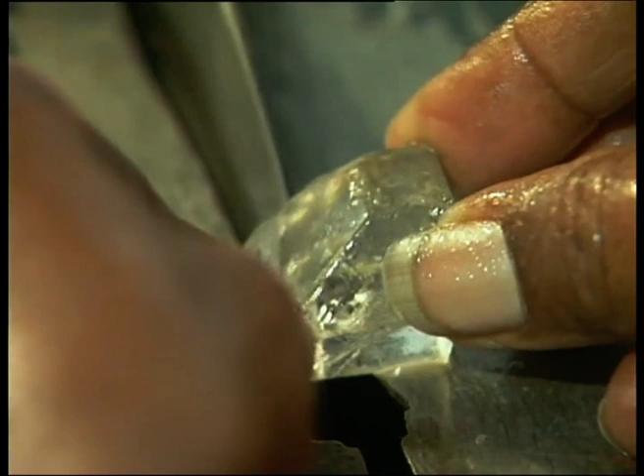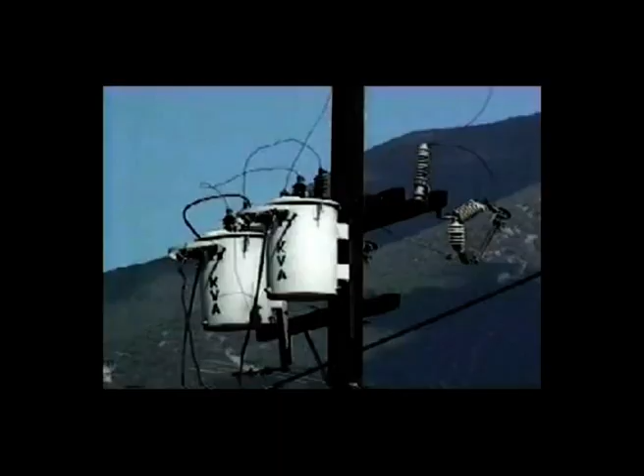The total quantity of usable energy available to people is called energy supply. Energy is of many kinds: electrical energy, kinetic energy, mechanical energy, and chemical energy. Electrical energy operates several appliances like pump sets, fans, grinders, vacuum cleaners, washing machines, and other industrial equipments.

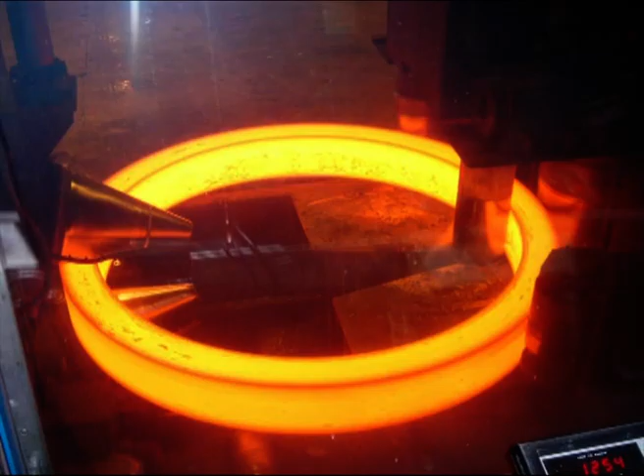Heat energy is used to cook food on stoves, shape metals, make bricks, and for several industrial processes requiring heat as a major or catalytic factor. Similarly, mechanical energy is used for many activities like moving vehicles, lifting and breaking materials, handling and aligning objects.

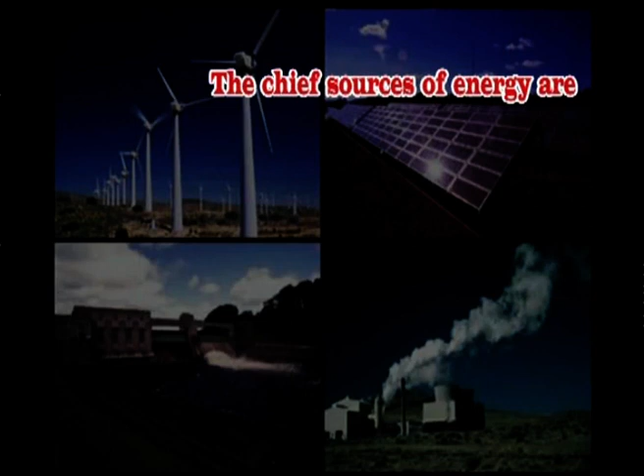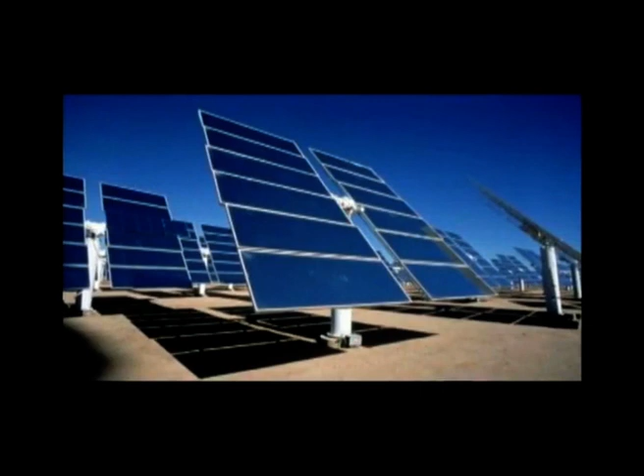Energy may be obtained directly from an energy source or indirectly. Energy is derived from one or more than one source. The chief sources of energy are fossil fuels, flowing water, biomass, and atomic minerals. In addition, solar energy, wind power, tidal energy, chemical and geothermal power also provide some amounts of energy. Not all continents have all the needed energy resources.

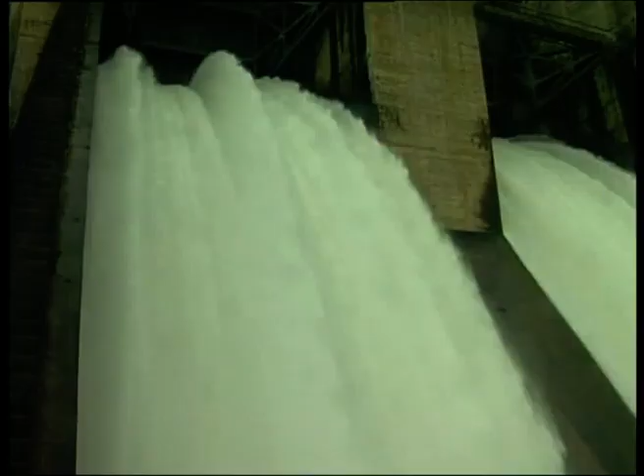These sources are classified into two major groups: renewable and non-renewable energy sources. First, renewable sources are those which will be available for human consumption again and again. The energy derived from water as hydroelectric power, sun as solar energy, and wind energy are renewable energy resources. Second, non-renewable energy resources are those which are permanently consumed for generating the energy and need further supply.

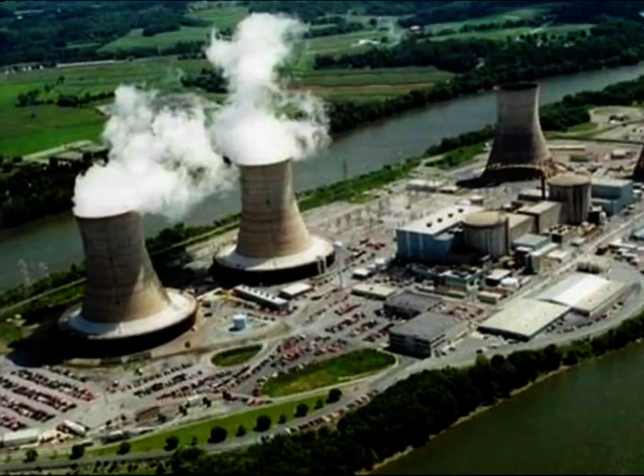Fossil fuels like coal, oil and gas, fissionable materials for nuclear power generation, and geothermal sources come under this category.

In this episode, the energy resources are discussed under the following modules: first, energy from fossil fuels; energy from sun and wind; third, energy from water; fourth, energy from biomass; fifth, energy from nuclear and other sources.

About 85% of the world's commercial energy comes from coal, oil and natural gas. These are called fossil fuels since they have been developed from the fossilized remains of prehistoric plants and animals. The use of these sources depends on their availability in the country.

Coal is made up of organic material which has escaped from oxidation in the carbon cycle. It is an altered residue of plants and trees of older forests which have been buried under sediments, and they were subjected to a set of geological processes and transformations.

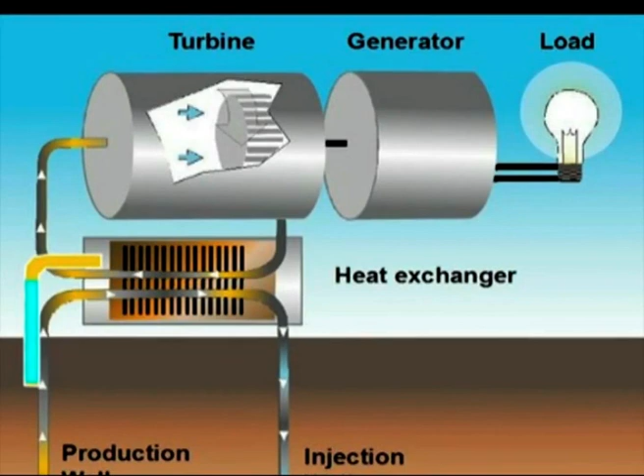Coal is burned to create heat to turn water into steam. The steam is then used to rotate turbines which will rotate the dynamos to generate electricity. It is also converted into another usable form called coke.

It is a charcoal-like solid which is an essential raw material used in the production of iron and steel.

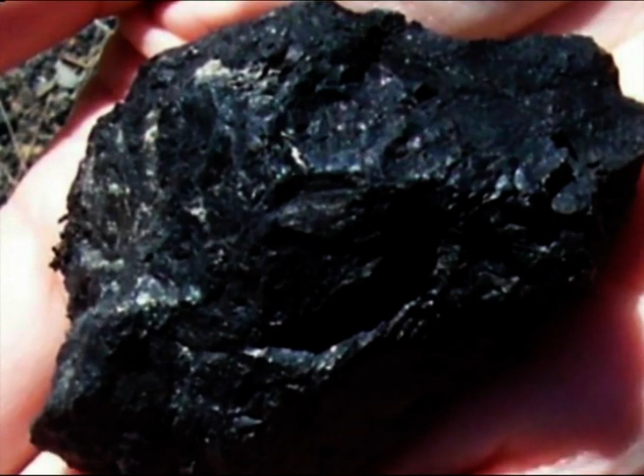Coal occurs in sedimentary basins as coal seams or layers. There are 4 types of coal occurring in the order of decreasing carbon content, volatile matter and moisture: anthracite, bituminous coal, subbituminous coal and lignite.

Peat is partially decayed plant matter found in recent swamp deposits. Peat and wood are the basic materials before the formation of lignite.

Anthracite is a rare form but the hardest variety of coal. It also contains more carbon and produces more heat than the other varieties.

Bituminous coal is the most commonly used coal by industries. It contains more carbon and produces more heat than either lignite or subbituminous coal. It is also suitable for making coke.

Coal contains some sulfur compounds. The sulfur content may be very low, that is less than 1%, or medium, that is 1 to 3%, or high, that is more than 3%.

Coal is mainly used in thermal power plants. While using it, the one having low sulfur will cause less air pollution.

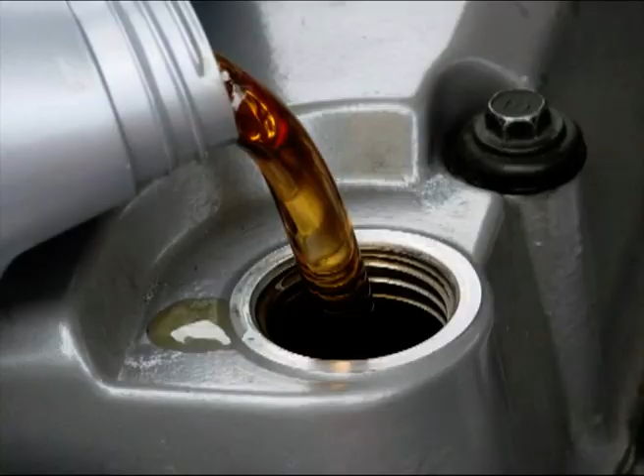The next major source of energy comes from oil. The oil that is derived from rocks is called petroleum. That is, petro means rock, oleum means oil.

Petroleum furnishes about 40% of the commercial energy used in the world. It provides most of the energy used for transportation and other activities of the population. In general, petroleum and natural gas, that is methane, are hydrocarbons. They are fossil fuels formed from organic material that escaped complete decomposition after burial. Petroleum is a complex mixture of hydrocarbons containing nitrogen, sulfur and oxygen.

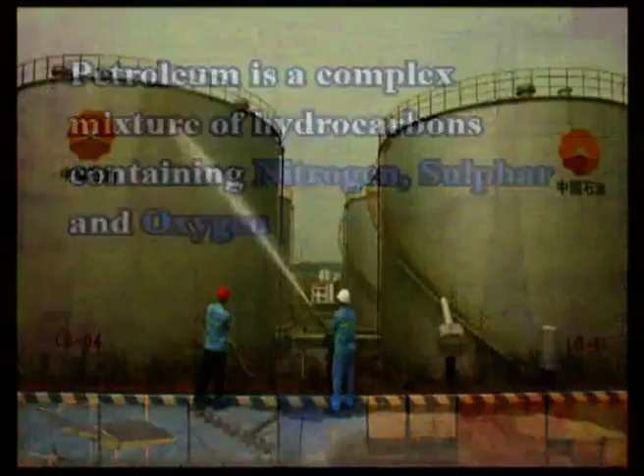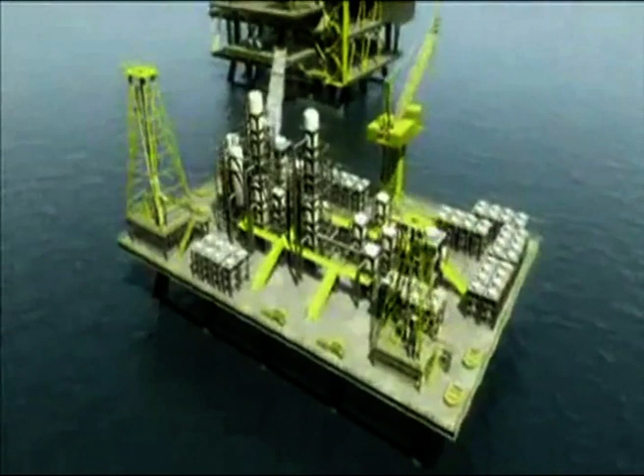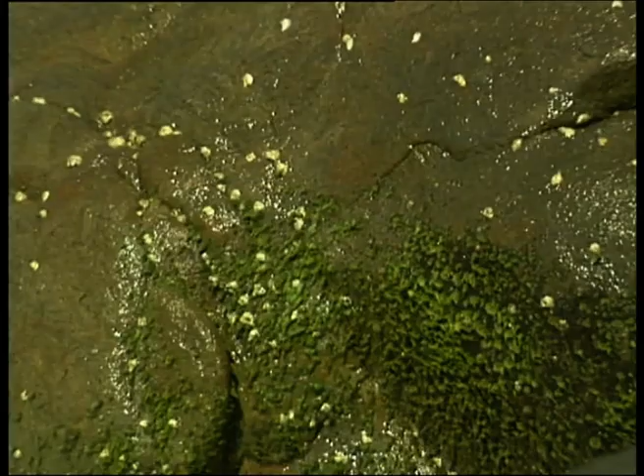The major source for oil and gas is fine-grained, organic-rich sediments buried to a depth of 500 meters or below stagnant oceanic waters. These might have experienced a thrust due to an increase in pressure and heat. The water is deficient in oxygen. Various geological and biological processes, involving bacteria, have promoted the chemical transformation of this organic material into hydrocarbons.

They tend to migrate through porous sediments called reservoir rocks. Like coal, oil also contains some impurities that can cause air pollution, but refineries can remove many of these pollutants when they process the petroleum.

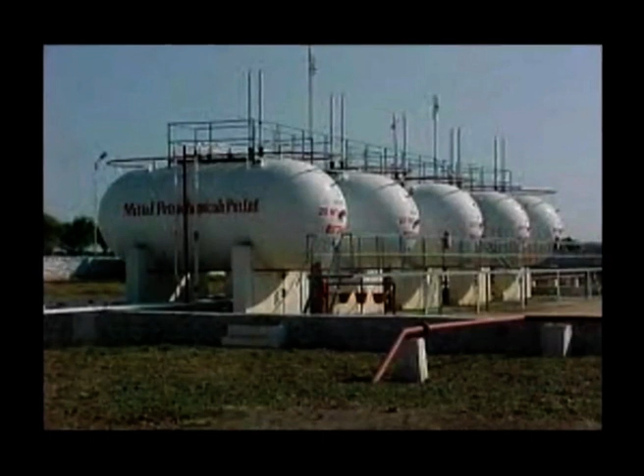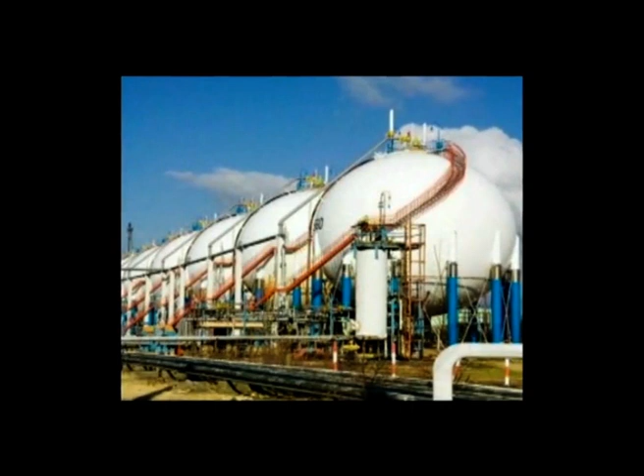Natural gas is the most convenient fossil fuel. It causes little to no air pollution. Natural gas is a clean source of energy because it is refined naturally during its formation within the earth and does not require further refining. In addition, it can be compressed into a liquid and transported long distances through pipelines.

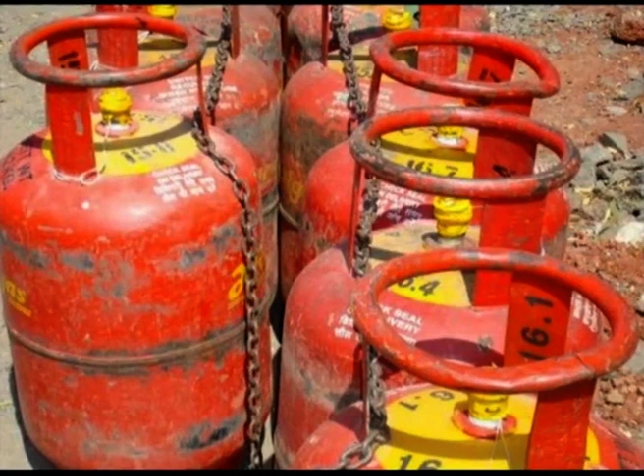Natural gas accounts for about 21% of commercial energy used in the world. Millions of people use natural gas to heat their homes, cook their meals, and dry their laundry. Typical gas consists of hydrocarbons having a very low boiling point. Methane, the first member of the paraffin series, makes up 85% of typical gas.

The following types of gas have been recognized based on their composition. First, dry or lean gas, comprising mostly methane. Second, wet gas, containing higher hydrocarbons. Third, sour gas, when containing more hydrogen sulfide. Fourth, sweet gas, containing little H2S. Fifth, residue gas, containing higher paraffins for extraction. Sixth, casing head gas, derived from oil wells by extraction at the surface.

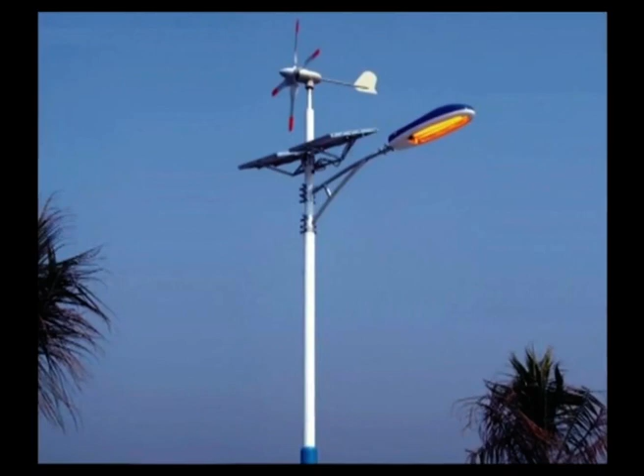The energy received from the sun's electromagnetic radiation is called solar energy. It is also used to produce electric power. This is a non-conventional and renewable energy source. There are two methods through which sunlight can be converted into electric power: first, photovoltaic conversion, and second, solar thermal conversion.

It is reported that solar energy falling on the earth every 29 seconds is equivalent to the human energy requirement of a day. It comes from the sun and is plentiful, but its distribution is sparse. It must be collected and concentrated to produce usable power, which requires some special devices. Hence, harnessing solar energy is an expensive affair.

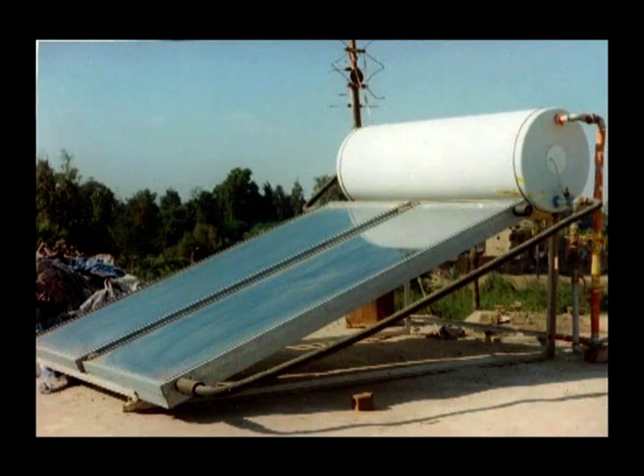A typical solar water heater consists of a coil of copper pipe brazed to a blackened metal base. This assembly is covered by a transparent glass plate or a plastic sheet. The water passed through the coil gets heated by the radiation. A very high amount of heat is trapped through this process during summer months.

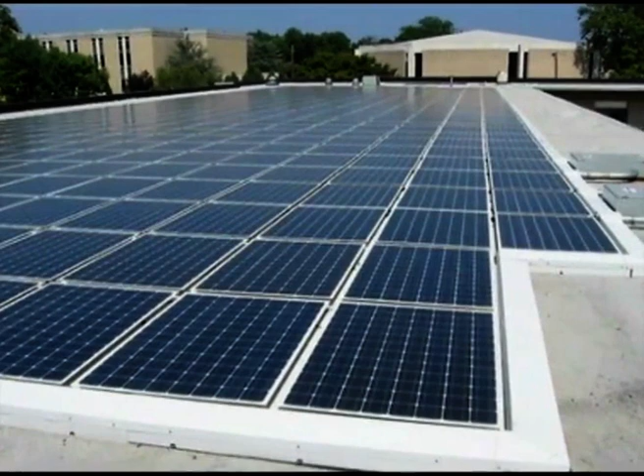Solar energy is also caught to provide power using solar cells. Solar cells are devices made from crystals of silicon to produce electricity from sunlight. They are the photovoltaic cells. Research continues on the applications of solar energy for pumping up water, refrigeration, solar ponds, and temperature control in buildings.

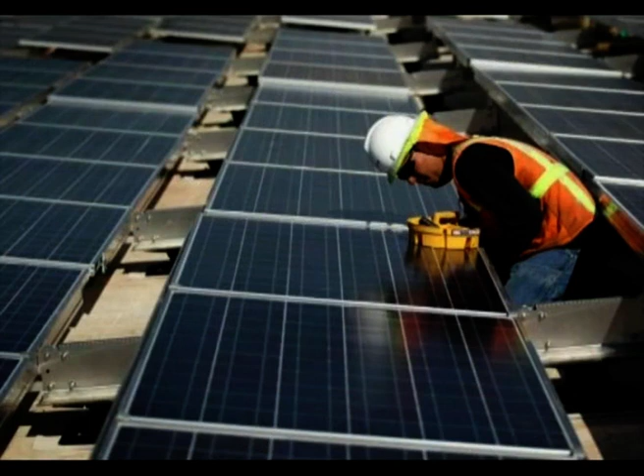Consumption of solar energy has many advantages, like unlimited supply, no production of air, water, thermal and noise pollution, no possibility of large-scale disaster, conservation of Earth's resources, and technology available for immediate usage. The major disadvantage is the expenditure involved in establishing the plants. Solar cells are more expensive, and they cannot completely replace conventional fuels.

Next is wind energy. The rapid depletion of fossil fuels and the increase in environmental pollution call for efficient use of other energy sources and the identification of alternate sources. Wind is a powerful agent of providing power. It is the best renewable energy source available on earth. Wind energy can be harnessed very easily. The blow of wind is allowed to rotate the blades of a windmill which is coupled to a turbine, and this drives a power generator.

There are some merits and demerits. First, the generation period is low, about 5 months, because of the seasonal availability of reasonably useful wind. Second, power generation starts immediately after commissioning the plant. Third, power is cost free, generation is cheaper, and recurring cost is less.

Fourth, installation cost is heavy and the maintenance of machinery is also expensive. Fifth, this is a pollution-free and environment-friendly generation of power. The wind power plant is also a source of income. A wind power generator of 200 kilowatt or 250 kilowatt generates an average of 6 to 7 lakh units every year.

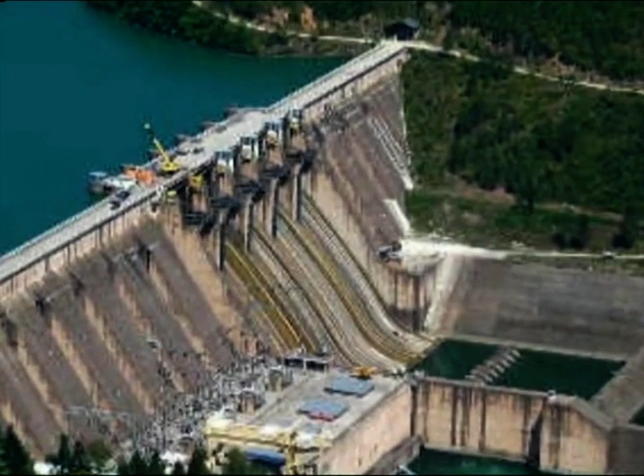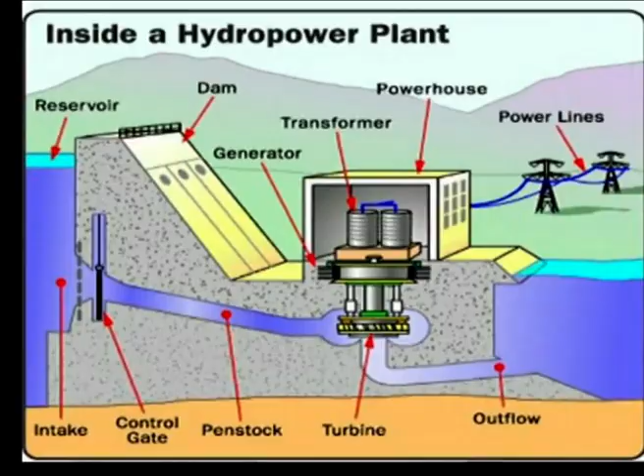In several hilly and mountainous terrains, establishment of hydroelectric power plants on perennial rivers has contributed the major electricity usage in many countries. Hydropower is a renewable energy source. Historically, water wheels were used to generate mechanical energy to run mills and machineries. Water power is a clean power. It requires no burning of any fuel. These power generators do not pollute the atmosphere or the hydrosphere.

Hydroelectric power is also combined with thermal power plants. With this combination, the thermal plant can supply power if the hydroelectric plant is affected by drought.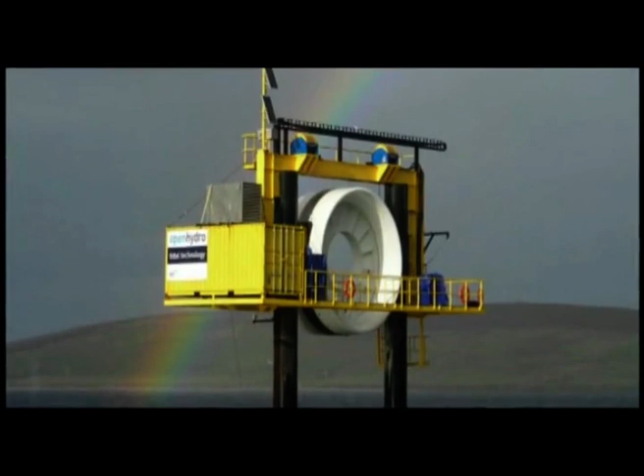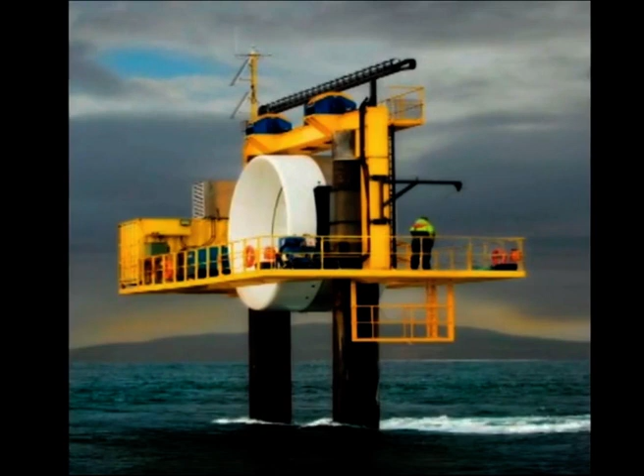Tidal power: tides and waves can generate enormous energy for consumption. The tides, which are dashing against the shores continuously, can generate the tidal power. This can be obtained by using a tidal dam built with a turbine. This is more expensive when compared to the hydroelectric power installation. In high tide zones, such provisions help in harnessing this power. There is also a limitation that it can produce electricity only at certain times of a year.

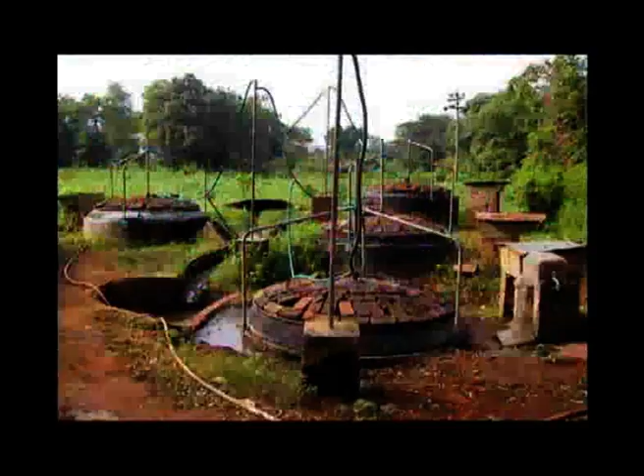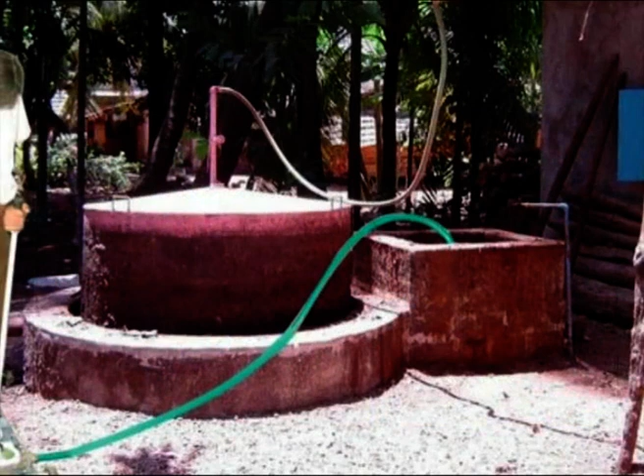Biogas is the methane gas produced or released from organic waste like sewage, garbage, manure or crop residues. These are decomposed substances in the absence of air. This is similar to natural gas in origin.

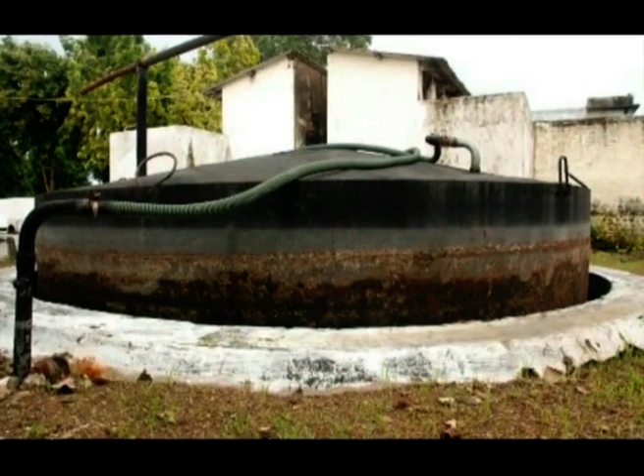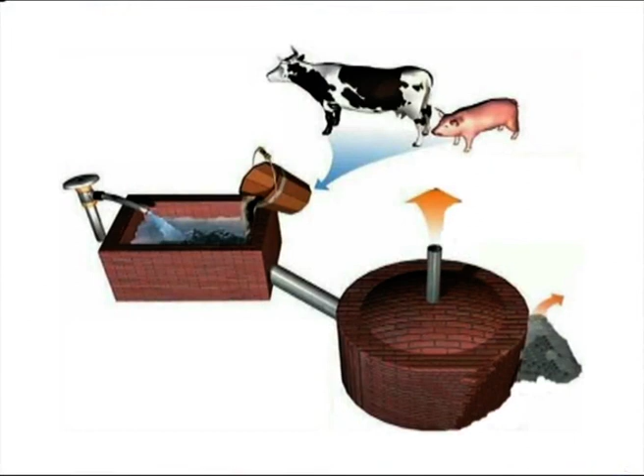Biogas can be collected using a container filled with the waste and closed at the top with a tap for trapping the gas. The wastes are mostly animal excreta or dungs, which are allowed to decay and decompose naturally inside the container. After producing the gas, the used up materials can be used as a high quality organic manure in croplands.

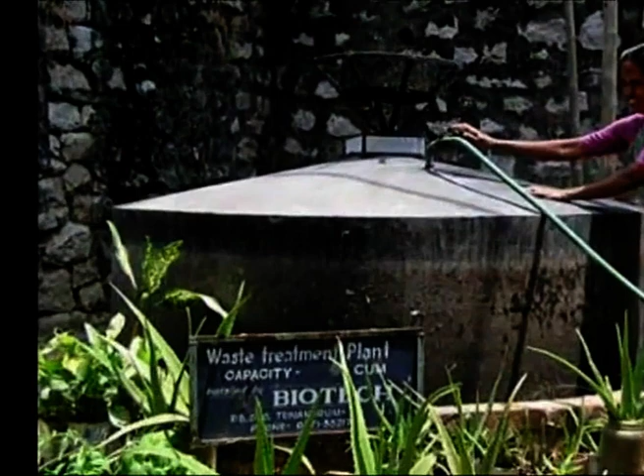Community biogas plants, industrial biogas plants, night soil biogas plants, family size biogas plants and improved chullas are some of the bioenergy sources employed and are under operational conditions in several parts of the world.

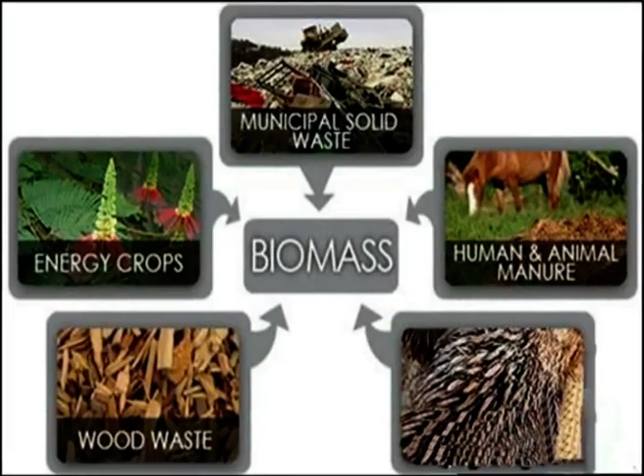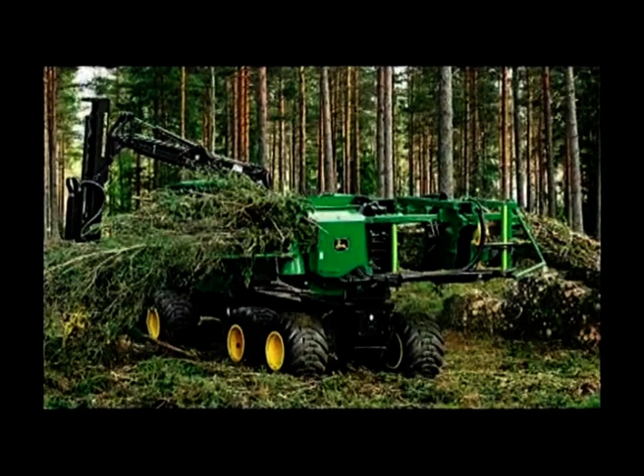Biomass fuel is the common name given to all forms of fuel generated from organic remains. These organic matters can be burned directly or indirectly as a fuel. A well-known popular biomass is fuel wood. Wood was used as a major source of energy in several parts of the world. Firewood is the best known biomass fuel.

Cow dung or cattle dung is burnt for cooking purposes. The distillation of biomass is done to produce alcohol for fuel. There are three major sources: first, forest products; second, unused agricultural products; third, urban waste.

Many of the environmentally conscious countries in the world depend on nuclear power for their electricity generation. At present, about 17% of the world's electricity is generated through nuclear sources. Nuclear source is clean, compact and concentrated. Nuclear power plants are similar to coal plants in that heat is used to produce steam to drive a turbine. But the basic difference between them is atomic fission instead of chemical combustion.

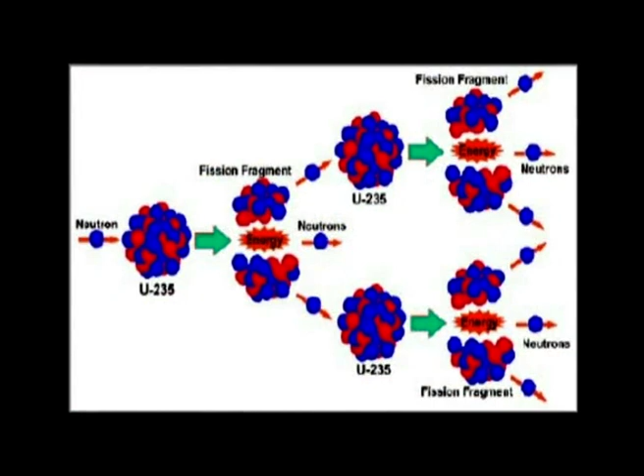A nuclear reactor requires a fuel substance whose nuclei can undergo fission. Such substances are called fissionable substances. U-235 and plutonium-239 are the widely used fuels. In addition to the fuel, reactors require neutrons. These are the stimulators for chain reaction.

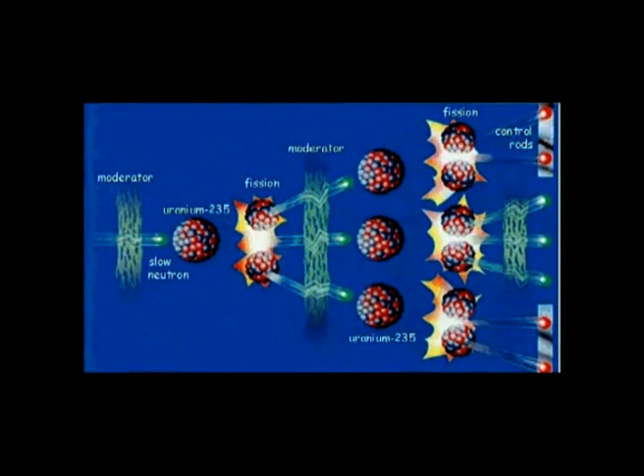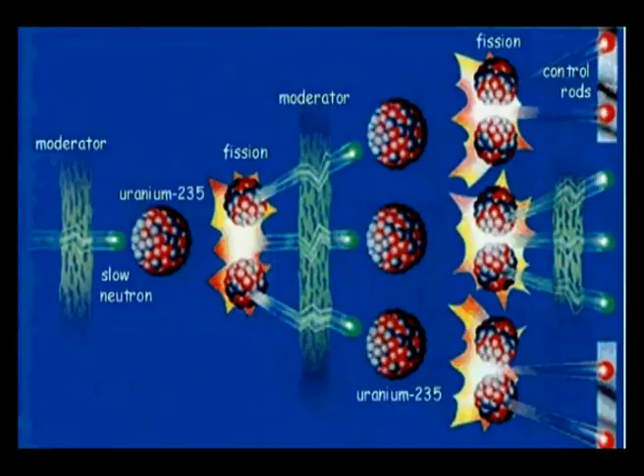Safety, design and operation of reactors depend on the way by which these neutrons are managed. Nuclear reactors are classified based on the fuel, coolant and moderator used to support the nuclear chain reaction.

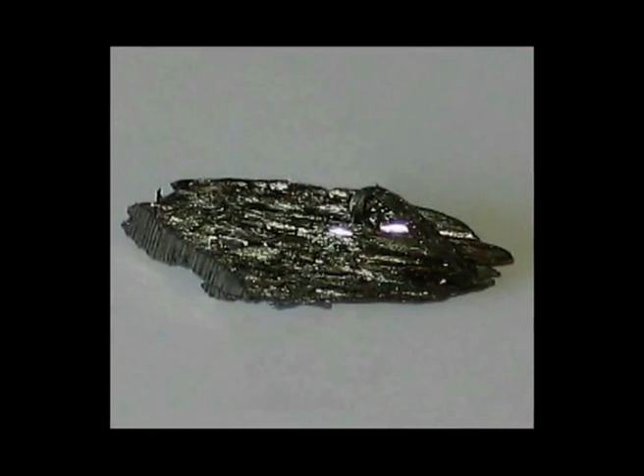The natural concentration of uranium in the Earth's crust is about 2 ppm. Uranium originates in magma. It is concentrated to about 4 ppm in granitic rocks and pegmatites, etc. They occur in a large number of minerals. They are called rare earth minerals or radioactive minerals. They contain uranium or thorium as an essential part of their chemical composition. Some of them are oxides and complex oxides.

The disposal of nuclear waste, some radioactive liquids and gases, will affect the environment severely. Sources are available in the form of fuel bundles which once loaded into the reactor core can provide energy for 1 to 2 years at a stretch before discharge. 1 kg of uranium gives an energy equivalent to 25,000 kg of coal.

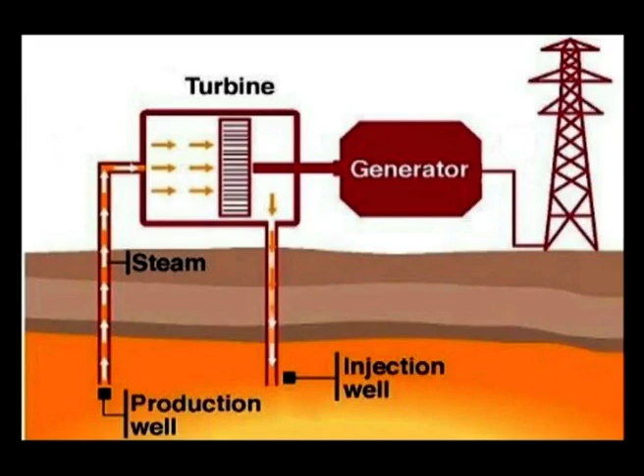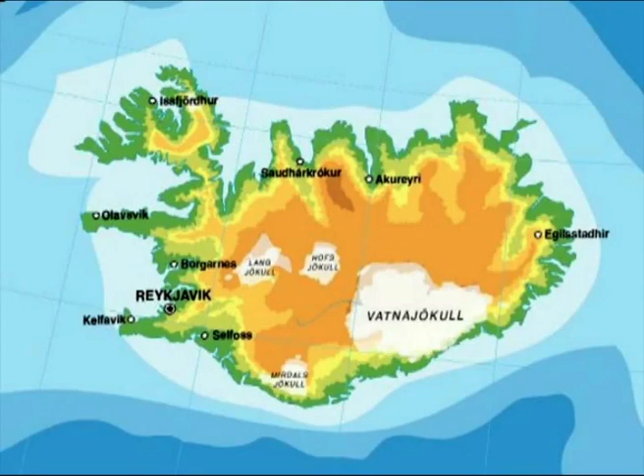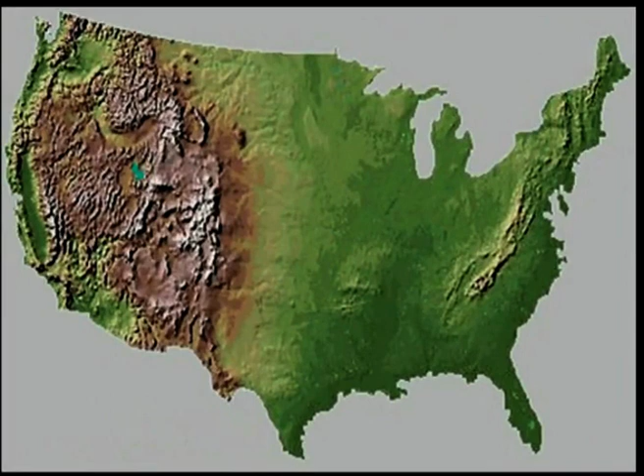Next is geothermal energy. This refers to the heat energy emanating from the Earth's interior which could be used for heating or for generating electricity. The production of geothermal energy can occur only in areas where hot rocks lie near the Earth's surface. Iceland, Italy, Japan, Philippines, New Zealand and the United States have developed geothermal power plants. The method is simple: by installing a pipe into wells drilled over the regions of geothermal sources and connecting them to a turbine.

We can conclude that energy is needed for the present and future generations. Earth has various sources of energy. The non-renewable energy depletes very quickly due to the pressure of population. Harnessing renewable energy is the prerequisite to our future survival. Energy saved is energy produced, a common slogan of the modern society. Let us save energy and use it appropriately.